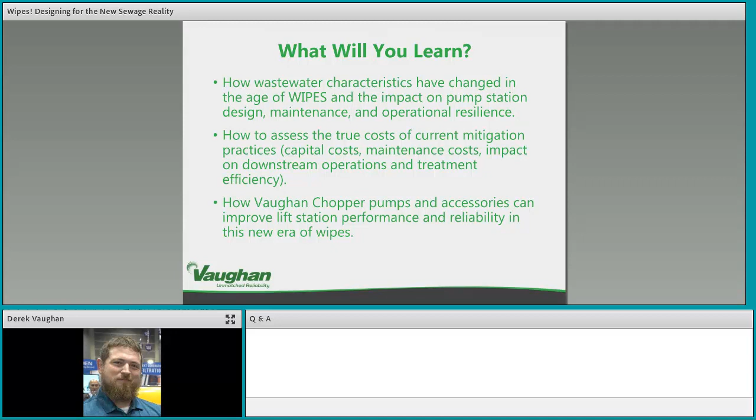So what we'll learn: how wastewater characteristics have changed in the age of wipes and the impact on pump station design, maintenance, and operational resilience; how to assess the true costs of current mitigation practices - capital costs, maintenance costs, impact on downstream operations and treatment efficiency; and how Vaughan chopper pumps and accessories can improve lift station performance and reliability in this new era of wipes.

So to start off, what is the new sewage? What do we see out there? The term 'flushable wipes' has been used, as you see in quotations. As we all know, it's non-flushable material getting into the lift stations and causing havoc - things like baby wipes, cleansing wipes, disinfecting wipes, throwaway mop heads, Swiffers, rags, diapers, elastics, hand towels, Q-tips, feminine products - things that are supposed to go in the garbage but instead make their way down the toilet or drain.

To compound this issue, we now have high efficiency appliances. One of the things they do in a lot of cases is use less water. So if you have less water but more solids content in your systems, that's where we're seeing issues. And I'd like to point out one thing common between every single one of these: they are non-spherical solids.

So what is the result of these flushable or non-flushable wipes? What do we see within our systems, specifically in pumps - can the solids get in, and if they do, what happens? Many times rags will create a rag ball and won't even be able to get inside the pump. They'll block suctions, bridge the suction, reduce flow. Long stringy materials will wrap on the impeller causing wear, due to large consistencies of rags. Once they get into the pump, they can get behind the impeller, attack the seal, and cause serious seal failures. And after the seal fails, if you're lucky, only the seal fails. If not, you could get infiltration into the motor where the whole pump is gone, or it needs to be completely repaired.

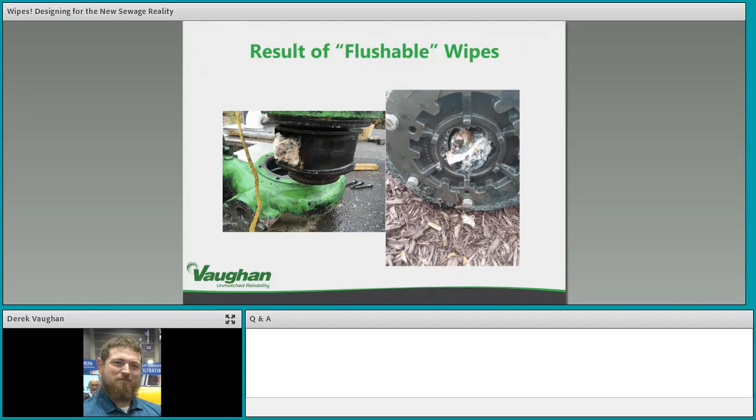So this isn't an issue that is quiet. Everybody hears about it. I'm sure you guys, just in March, there were articles in USA Today, New York Times, the Wall Street Journal urging people, do not flush these things. They wreak havoc on the systems.

We monitor social media and are involved in social media, and we are part of different operator websites or operator pages. And the buzz is the wipes are everywhere. They're clogging systems, they're costing more money.

The amp draw due to having rags inside your pump - the cause of having wipes in your system and increased drag on your impeller could be added electricity costs, higher amp draws. Here, like you see here on social media, we have where people ask, please don't flush these.

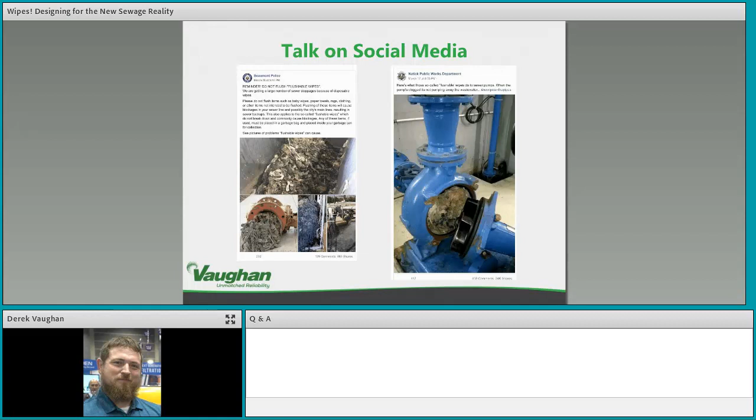states like Washington State, with House Bill 2565, has been passed by both legislative bodies, and it has to do with labeling non-flushable on the packaging of these wipes. Currently, California has a proposal in their House, Minnesota has a proposal in their House, and Washington, D.C. has already passed these labeling practices.

So what's the cost? This is a study that was done by the National Association of Clean Water Agencies. The annual cost of wipes in the United States that they attribute to this issue is $425 million. Some estimates on the web that we've read are even north of that, up to 500 million or even more. And other studies have shown that our friends to the north in Canada are seeing approximately $250 million of issues as well.

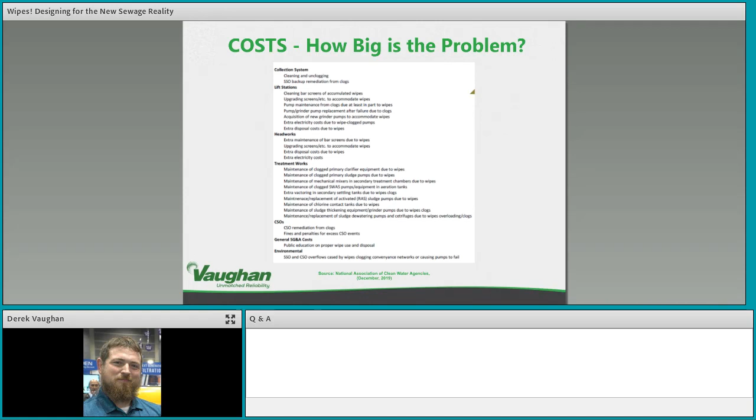So if we run through an example and we just take some basic numbers so we can create a baseline - what does it cost at least to work on a station? Now the cost of clogging in a pump station, what we've worked with other groups, they tell us it takes usually 2 wastewater personnel - you need one person there and one person to watch to make sure that everything goes okay. And if you were to say that in Washington State, the average salary of a wastewater operator is $31.24 per hour.

And you were to say that these guys are very good at what they do. They know this station really well. They may even have tools on site at the lift station, and they can do the unclogging in 2 hours. They can go down, cut all the rags out, cut the wipes out, remove them, put the pump back into service, and that only takes 2 hours.

Now, if you do that and you go down - and this is just like a Tuesday, a 9 a.m. on a Tuesday, no overtime, there's no overhead cost figured into this - if 2 guys, and it takes 2 hours, and they unclog a pump once a week, the base of that is $6,500 a year. If they go down and do 2 clogs a week, that'd be almost $13,000 a year. 3 clogs, almost $20,000 a year, and it goes up to $45,000.

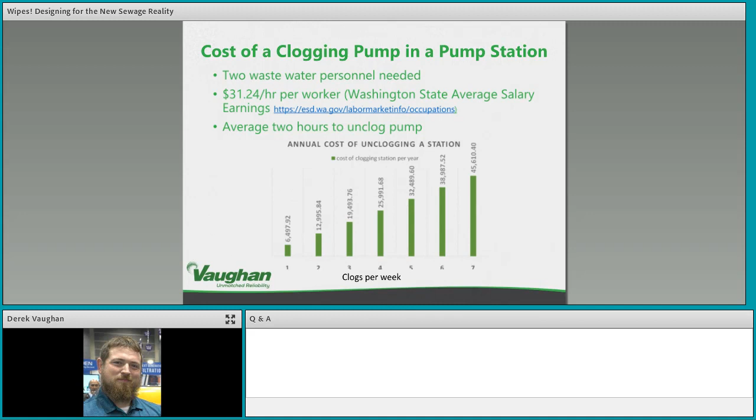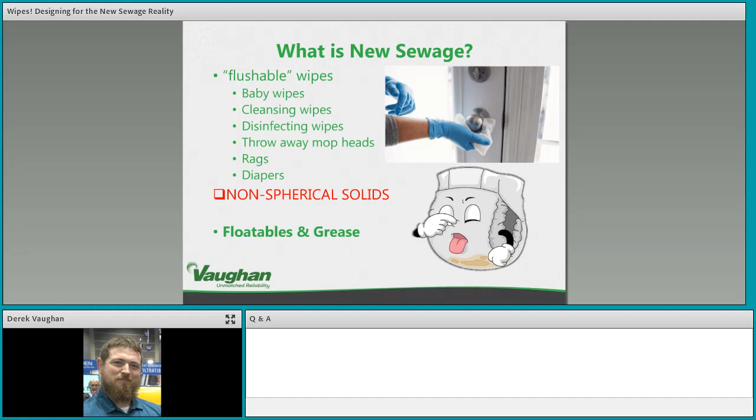So what else is in the new sewage? We've talked about the flushable wipes and all the non-spherical solids. What else are we seeing? Floatables and grease. So what is floatables and grease? Where do we see it?

Why is it there? We see it a lot in high traffic areas, restaurant areas, downtown areas, shopping centers, stadiums, anywhere where a lot of industrial cooking is done, or areas of housing where people are cooking their food and they decide, I don't want to take the grease and dump it out. I'm just going to dump it down the drain.

Well, that little bit of grease, maybe that one time isn't too bad, but if everybody in the area is doing it, you'll have an accumulation of grease on the layer. You'll get floatables. And the problem with that is the floatables will become intertwined with rags and wipes. And you'll have what you see here, which is a station in California.

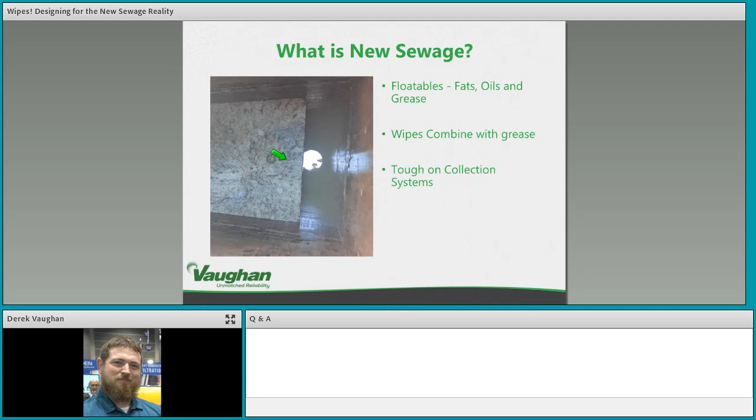So what is the result of grease in the collection systems? What does it do? Well, besides clogging a station, we all know it clogs pipes. That's an issue. But you get poor station operation, clogging, costly maintenance. How often do you have to clean that station? How do you clean that station? You can also get blockages.

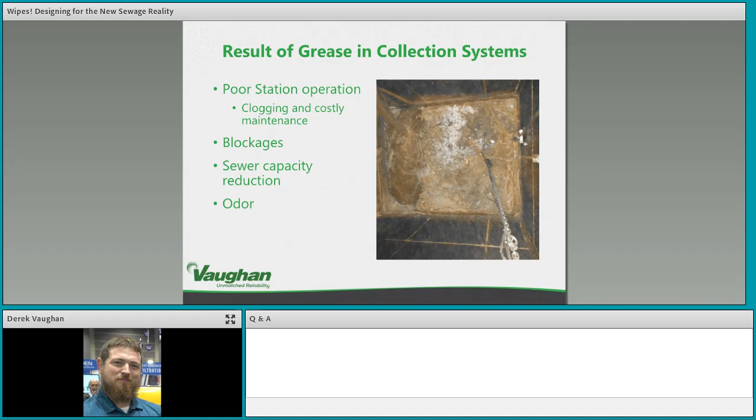What recently has come up is in cold weather environments, this floating layer will freeze. And when it freezes and the duty pumps pump out, this floating layer will drop on top of the liquid level, and it can break things. It can rip floats out of the wall. It can knock the pumps off of their base elbows. It can be an extreme issue. So it's a problem in a lot of areas. Also odor. If you leave that there could be an extreme odor issue.

So just some round numbers to talk about the cost of cleaning a lift station. Everybody has their costs. We've been told $50,000, $100,000 to clean this station. But what does that mean? Where is that coming from? When you clean a station, there's some things that you need. The potential for a vac truck is high. Do you want to buy a new one? Between $250,000 and $450,000. Do you contract it out? $255 to $295 an hour for vac truck services. These are all costs that were taken from Washington State.

If that's the case, you're going to use a vac truck. You also need a sewer pumper truck, because if you're vacuuming out the waste, you need to put it in the pumper truck and send it back to the wastewater treatment plant. What about a bypass pump? Do you need a new unit? What about the cost for that per day? Major rental companies have given us pricing on these things. And for a 6-inch model, you're looking at, in Washington State, about $450 per day.

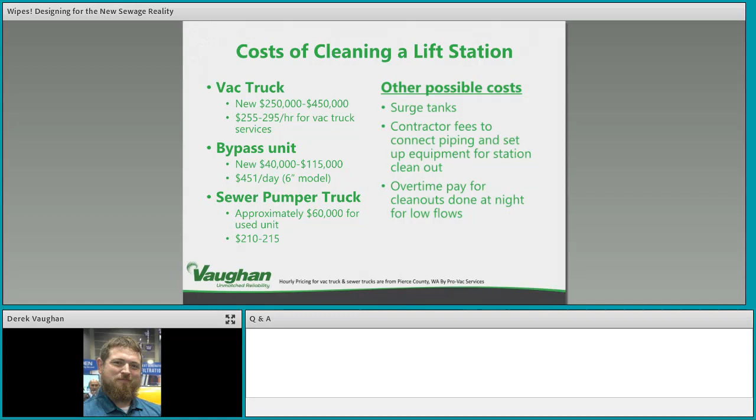The other things that might not be thought about when you have to clean a station is, can this station be taken offline or can it not? Is it an extremely important station? If that's the case, you may need surge tanks, and the cost just to bring them in could be $500-600 a piece just in freight. And then you start talking contractor fees, connect piping, set up equipment for station clean out. And if this is an important station that cannot be shut down, then you have to do the clean out at night. Then you add overtime pay and the pay of the other workers. It ends up adding up very, very fast.

Now, this is the cost of a typical city, 3 MGD. This was taken off of a municipal website. This was the winning bid for cleaning lift stations in Burlington, Massachusetts. Burlington is a town of 25,000 people, approximately 15 stations, and they actually contract with the group. They clean out every 2 weeks. Cleaning events, 780 hours is what they're estimating cleaning to be. The material costs, as you see, the hourly rates. The winning bid for this city was $180,000 per year to clean stations.

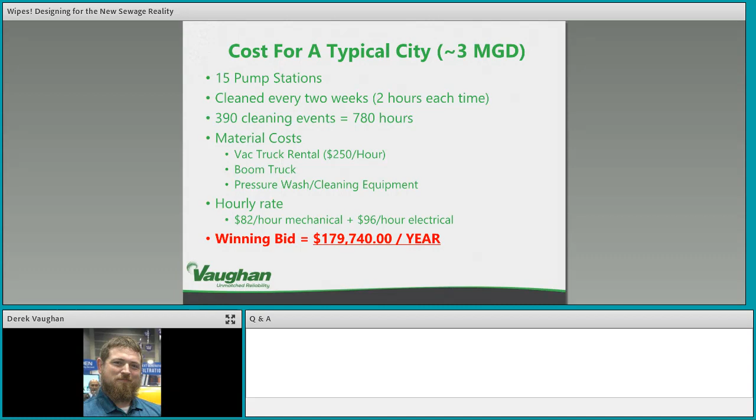One thing we haven't talked about is the cost of health and safety. We've talked about the cost of wipes and what they do to pumps and the amp draws that they cause, and the grease and the issues, but what is the cost of health and safety? To us, there isn't a cost. You don't want to be there.

And what you want to do is, the frequency of cleanouts, the frequencies of unclogging, the frequencies of draining an entire station and dealing with the waste, it's unnecessary exposure. So what we need to do is minimize this unnecessary exposure. I've been places before where you can see in this picture these rag balls and these hypodermic needles. They were calling these porcupine balls as they brought them up from the station because they'd be filled with hypodermic needles.

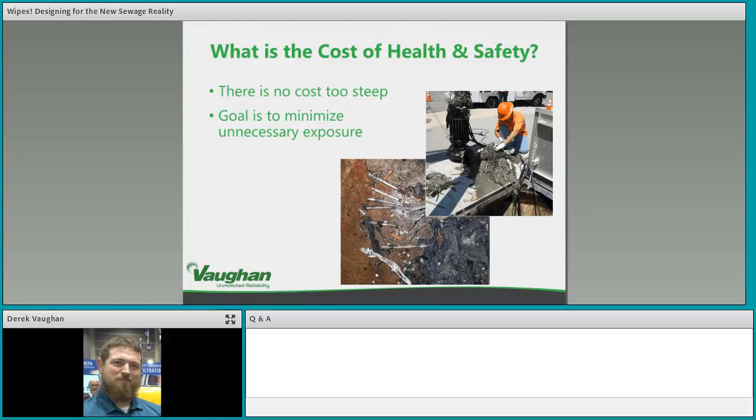So what can Vaughan do for you? What sort of innovative and reliable solutions to the new sewage do we have? We'll talk a little bit about Vaughan Company. We've been around for 60 years. We've been awarded 30 international and domestic patents for our chopper pumps and mixing equipment. This is what we do. We've been designed for tough waste and tough wastewater, for stringy solids, for these issues.

Now, this is a rundown of what we like to call the concept, which are our cutting features, including our Vaughan Flushless mechanical seal. So here at the eye of the shaft, we have what we call the cutter nut. And the cutter nut breaks up the low pressure zone at the eye of the shaft where you can get some rags that will form and ball up.

You have our stationary cutter bar with its cutter bar fingers, and the impeller, which has cupped and sharpened blades that rotate against the cutter bar fingers to create a scissor action that chops and then removes the material from the casing. And on the back side of the impeller, we have what's called an upper cutter. Now, this is for mechanical seals to prevent breakdowns of the mechanical seal, to prevent stringy material from binding and wrapping back there. And then we have our Vaughan Flushless mechanical seal, which is our design.

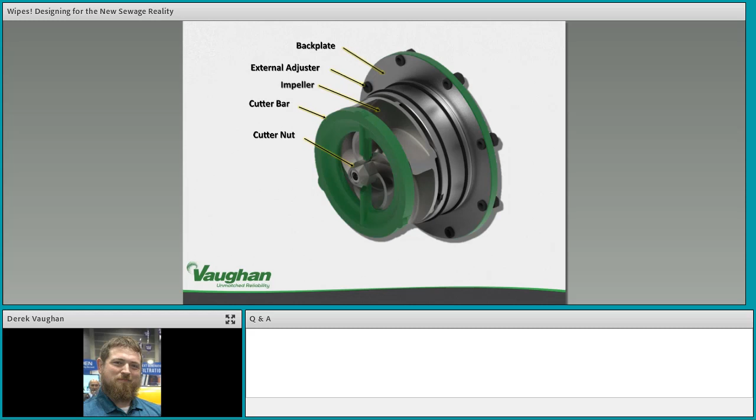And so one of the issues we had talked about is seal failure. And in order to prevent seal failure, Vaughan Company has created a patented back cutter system, including insert cutter, which prevents stringy material from wrapping and binding around the mechanical seal. In many places in here, you have a cavity in other people's pumps, and that cavity can fill with grease, with sludges, with stringy material, and then cause seal failures.

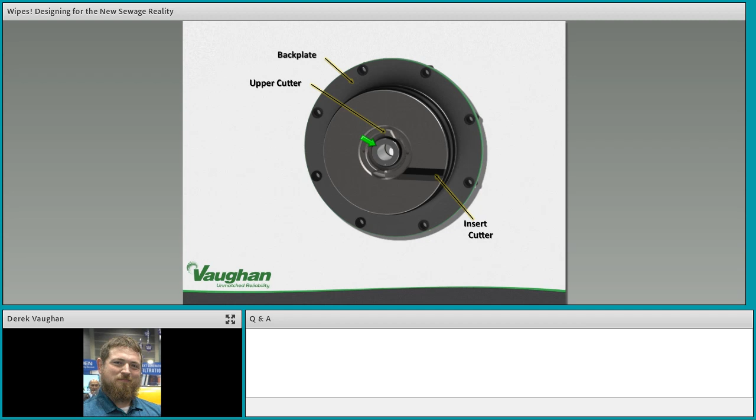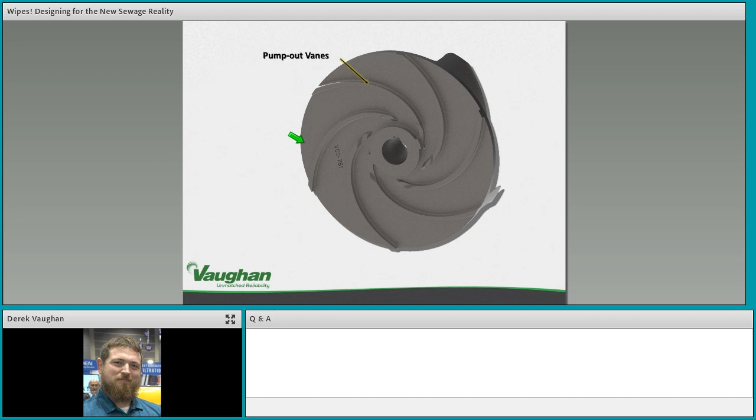So what do you do once you chop the material away from the backside of the impeller? Well, at Vaughan Company, we incorporate pump out vanes. So as those stray stringy materials get cut away from the upper cutter, they are sent along the impeller vanes and forced out. So we don't have those stray solids getting stuck behind the impeller. Again, the job is to get the material in and get it out as fast as possible.

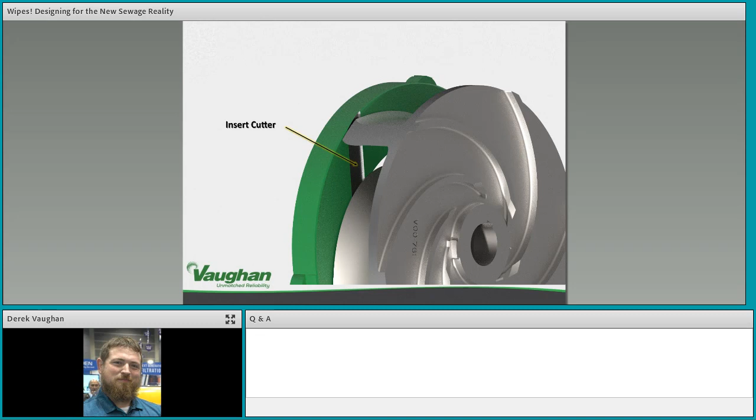Vaughan Company has identified these crucial pinch points, and we've created cutters in those areas to prevent that binding that you will see. The other thing that the chopper pump does is it creates a natural turbulence within the pump. We do very well with grease. We handle it very well, in that it doesn't stick to the inside of our casing like it can for some other pumps because of that natural turbulence. We pump a lot of fats, oils, and grease at wastewater treatment plants for this reason.

So Vaughan Company in the 90s decided to start designing and manufacturing our own Vaughan Flushless mechanical seal. The reason is the radial loads caused by chopping were breaking third-party seal faces regularly. So we needed an option that allowed us to have longer life and be able to deal with these stringy, tough solids and the radial loads caused by chopping. So in the 90s, we came up with our Vaughan Flushless mechanical seal. It's been in service for over 20 years now. It's what we recommend in every case.

It is a cartridge type, so it's easily removed and easily replaced. It is oil filled; it is in an oil bath. The seal faces can come in silicon carbide or tungsten carbide. They come standard as silicon. The tungsten carbide faces we use in gritty environments where we may run hotter, and it could be a better option for longer seal life. Like I stated before, our design eliminates the stuffing box and cavities behind the impeller. We saw that as a weak point and an issue, and I believe we've solved that.

It's easily maintained. As you can see, there is a vent here. So as the pumpage may blow by, which happens naturally in mechanical seals, you'll have some weepage across the seal faces. If you do get anything that collects in here, this release valve will allow it to drip out. And once you notice that, it's easy to go and flush really quick and be able to move on.

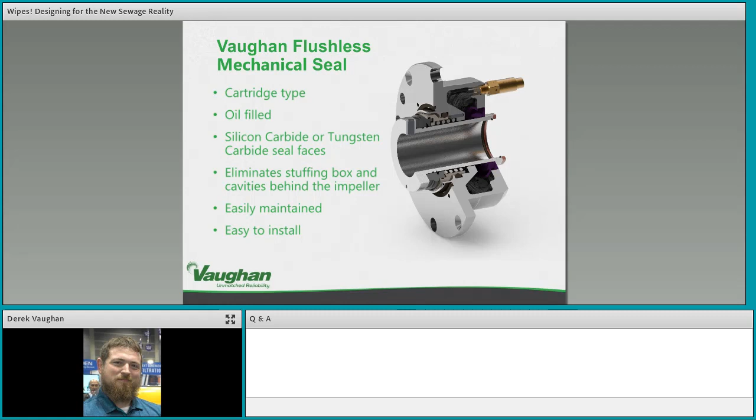So since we're talking about mainly lift stations, I wanted to discuss our Vaughan Chopper pump and our submersible Vaughan Chopper pump specifically. We do things a little bit different than other people. We've added a Vaughan mechanical seal to the mix, which is placed inside of our bearing housing. And you'll notice that we are not using the motor shaft. We're running two shafts, through a bearing housing. The reason is that if you do have a seal failure, it happens. It's going to happen eventually with any pump. If you do have a seal failure, it doesn't go directly into the motor cavity and then fry the motor.

If you do have a mechanical seal failure and you do get intrusion of liquid, a milky type substance, or it just drains the seal oil all the way out, we have an oil level monitor relay that can be connected to the panel. This is an early warning sign and an early detection system that helps protect. It's a reliability issue. We want to be reliable. We want to make sure you know if something happens.

As you can see here, this is a non-flexible coupling. This is a steel coupling. We've added another thrust bearing down here. These have 100,000 hours of L10 bearing life. Every submersible does, every Vaughan pump does. We want these things to work and we want them to last.

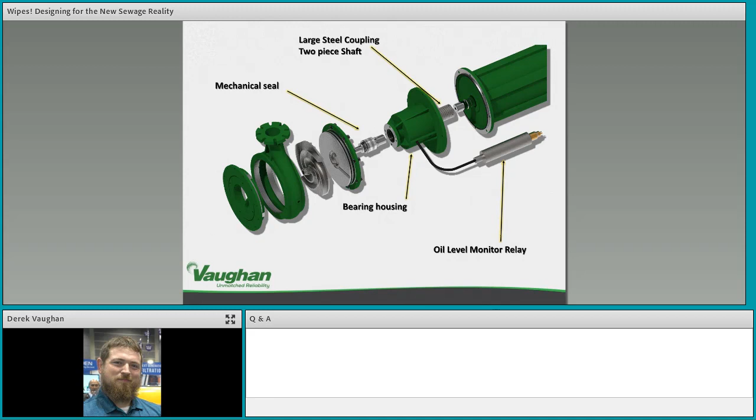So what sort of things can Vaughan Company do for you, and what sort of costs can they save by using a chopper pump? This is a case study we did several years ago. This is the Aberdeen Influent lift station. The old pumps that they had in service were clogging on rags. It was happening approximately once a day. It was something that was on a schedule. They knew that they had to go down. They knew they had to unclog it. It was what it was.

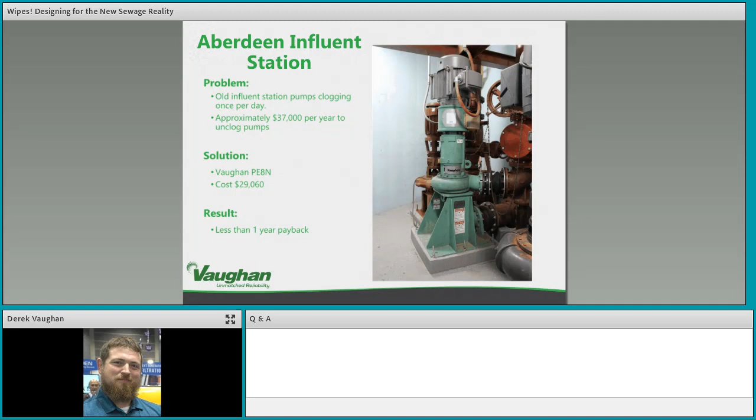They called up Vaughan Company. We were able to offer a pedestal pump, a drop-in pedestal replacement. They didn't have any clogs for the rest of that year. So with the cost of that, $29,000, they were able to remove the cost of unclogging that lift station. And at this time, they're looking at purchasing a larger pump or sourcing a larger chopper pump to help with more flow.

One thing I'd like to point out, Vaughan Company knows that some customers are on budgets. You can't always do a full capital project. So how do we mitigate costs in order to help out with these sorts of problems?

Vaughan Company does retrofits, and we're adaptable. In this situation, we were able to make a custom base which matched the suction and discharge heights, which made piping changes very limited, so we were able to reduce costs to install the pump.

We also can use existing guide rail systems, and we can adapt to many of them.

Lots of times we end up replacing grinder and non-clog combinations. That combination has its place, but there are issues with it. You have two pieces of wearable equipment to maintain, often two panels, and the cost to repair grinders can be very expensive. So we've been able to replace a lot of those with one piece of equipment that can do the same thing two pieces of equipment do.

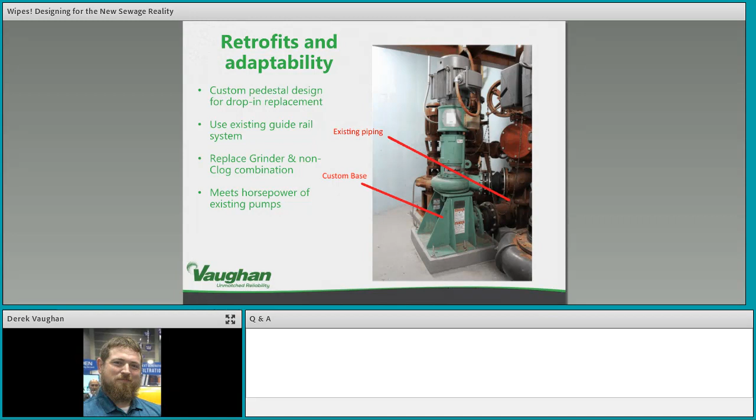So, solutions to floatables and settling solids. What can we do to counteract the issues you're seeing with floatable layers and settling solids that happen in tanks?

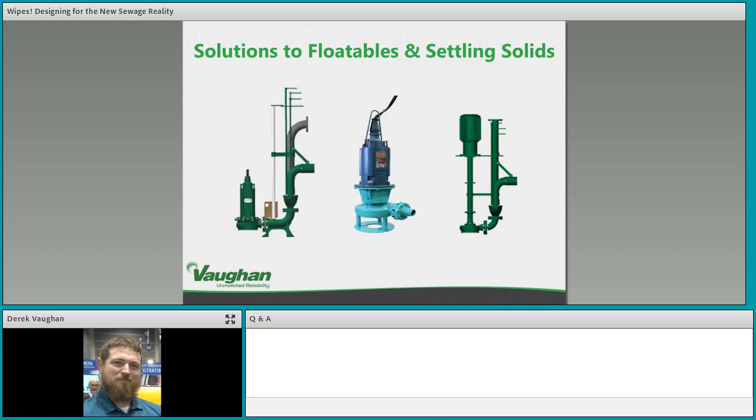Here on the left, you'll see our submersible pump with recirculation device. This allows for 100% of the flow, the duty flow, if this is the duty pump, to be sent back into the pit to help homogenize and mix. We have the exact same thing for our vertical wet well configuration if that's something you'd be interested in. And also in the center is our conditioning pump.

To talk a little about recirculators and submersible recirculators specifically, a recirculator is essentially a pit cleaning device. Once you throw the valve into recirc mode, you're resuspending solids, homogenizing the mixture, and pumping out. So how do you clean something? You can't reach in and grab the floating layer, and you can't reach out and grab what's settled on the floor. So in order to get that out and clean it, you need to homogenize, mix it together, create a slurry, and then once it's all slurried, you can flip the valve and pump out.

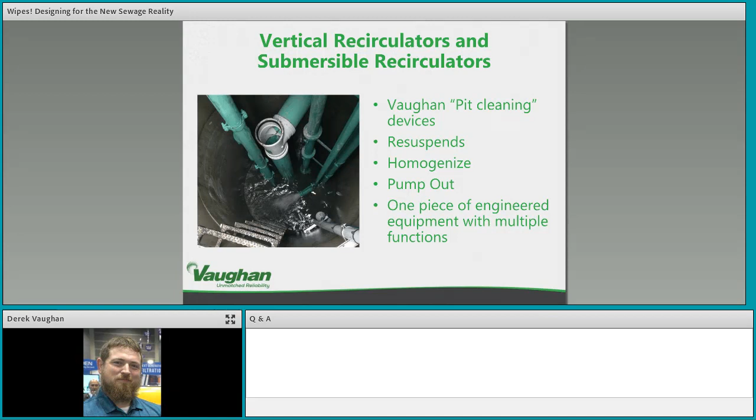What we're saying here is this is one piece of engineered equipment that has multiple functions. You can do the pump out, the mixing, and the station cleaning, all with one rotating piece of equipment.

Here's a picture of some submersible recirculators. As you can see, we have the ability to run a duplex system, and you don't have to have recirculators on both pumps. In this situation, we only have it on one, so they can enter recirc mode. These nozzles are adjustable a minimum of 180 degrees horizontally and 45 degrees vertically. We can also run this on an auto valve actuator system where you can be in pump out or recirc mode.

The importance of having recircs in a station like this is to prevent mats from forming in the first place. We want to be proactive, not reactive. So how can we prevent these issues from happening altogether? That's continuing agitation in a station in between pump outs. Depending on the station, it depends on how often you have to pump out or how long your recirc mode runs. But that's something we would be able to help decide.

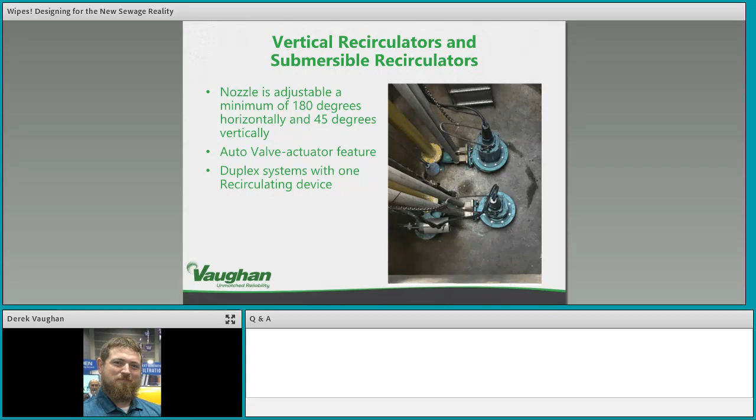So for the next couple animations, we're going to work through how you go about adjusting the nozzle and the adjustability and valving that's available here. We've got a little bit of an animation here. As we work through these, this will show the different operations of the vertical recirculator, and this will be the exact same setup for a submersible recirculator, except you won't have the discharge pipe and motor. You'll just have the different handles and accessories.

As we open this valve here, this valve down here will go back and forth as it swings open, and this is how you change between discharge and recirc operation mode. It's just a simple valve on a handle that you can turn, and this is the handle that would be attached to an auto valve actuator for applications where you want to set this on some timing where you're recircing for a certain amount of time and then switching over to your discharge. Next, we're going to show how you go about changing the direction of the nozzle.

We've got a little dog ear here that holds it in place and locks it in. This can be locked, and then when you open it, it frees up this handle to move, so you can move this back and forth. This changes the direction of the nozzle down here and allows it to swing. This only shows a limited range so you're able to follow it. We weren't able to add the video animation in here because of different connection speeds and how everybody would view this differently, but this will actually swing all the way to 180 degrees. That's how you control the back and forth motion.

For the up and down directions, there's a pin that comes in here to hold it in place, and then this can be raised and lowered to move this up and down. So you can see as this goes up and down, the nozzle goes up and down, and that's got 45 degrees of motion. And then whenever you're done moving the pit, you put the dog ear back in place, and you're ready to go.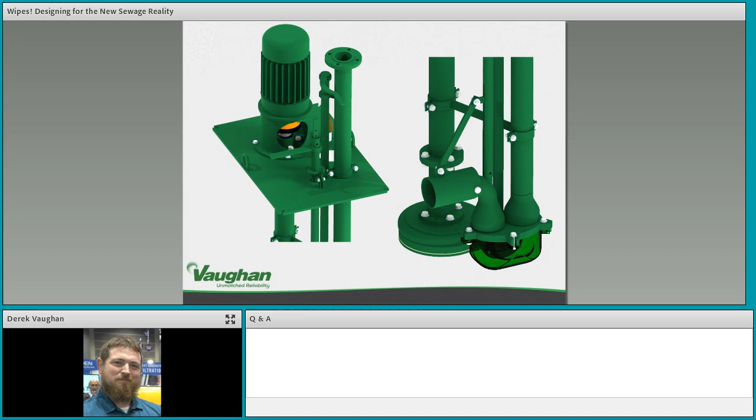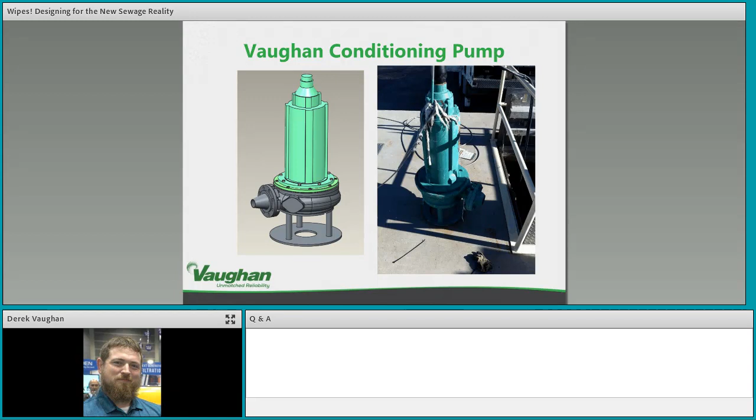So moving on, what else does Vaughan Company offer in order to slurry a pit? Our patented Vaughan conditioning pump is one way to do it. We've had these for approximately 5-6 years in service. We have close to, I think, 75 out there working, and it seems like whenever we get them out there, there's success. So what is a conditioning pump?

A conditioning pump is a chopper pump on a stand with a high velocity steel mixing nozzle. What it does is it's mobile. You can put it in one pit, mix it up. Once that pit's mixed up, you can take it to the next pit, mix that pit up for easier cleanout. There are multiple styles of nozzles for aiming configurations - we have up-aimed, we have double nozzles. We also have different nozzle materials. They can come in mild steel, stainless steel, or a polyurethane type material.

One thing is we also use oversized bases, and what I mean by oversized bases is this portable stand right here. As you notice too, the nozzle is located below what would be the center line of the pump, the center line of gravity. So as this mixes, there isn't an issue with it tipping over.

Also, this is an engineered solution. It's very important to point out that we need to know what the exact problem is that we would be dealing with. Is it a floating layer on top? Is it rags and wipes that could be clogging a duty pump that we need to take care of? Is it settling solids? Or is it everything? We have sizing based off of all of it. We have sizing based off of what we need to do to mix a crust on top of a pit.

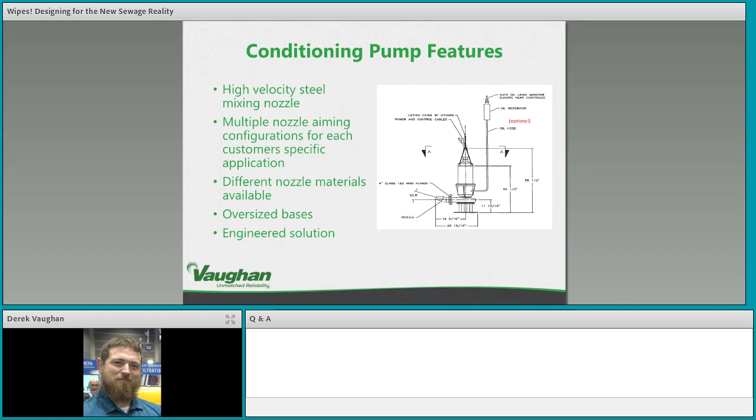And what are the applications to look for? Lots of times we see them used as protection for non-clog pumps. You end up in an area where it's too expensive to replace the non-clogs, too expensive to go in and clean the station all the time. So you can put this pump in there with the chopper to recirculate and mix, homogenize solids, floatables, and grit, get it back into suspension, allowing the duty pumps to pump out and get everything out.

A lot of times when these are used, we've been able to eliminate the use of vac trucks completely. They've been able to just go away. Another option is that it lengthens the time of cleanouts, so you don't have to go in there so often.

One great side effect of any recirculator pump that Vaughan puts out on the market is that you're consistently mixing this material back into suspension. And when you do that, it allows a constant stream of these solids to go to the wastewater treatment plant. You're not getting a slug of it, not getting it vacuumed out and dropped right into the headworks. You're getting this constant metering of material in that the screens can take care of as it gets to the screen.

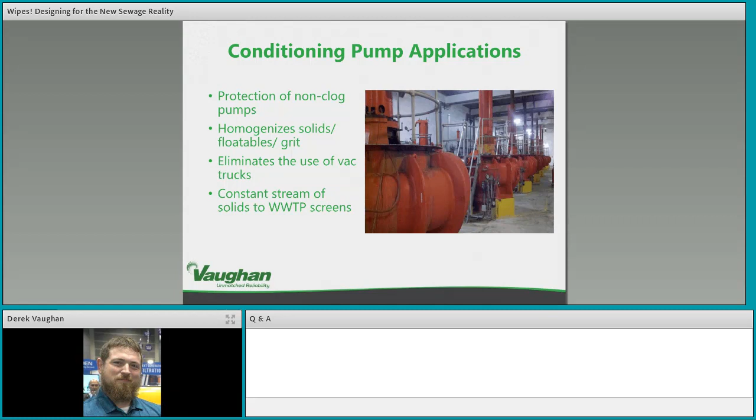We also have control panels for the conditioning pumps. Again, they're like the recirculators. They can run as often as 24 hours a day, 7 days a week, or they can run intermittently. We can run them on floats and timers. We have moisture and thermal relays. We also have an oil monitor relay, and that's optional.

For the conditioning pumps, I want to note that it is optional to have the oil level monitor relay because they are mobile, they do move around. So what we do is we plug the bearing housing and just say, please do your preventative maintenance. Don't lax on that.

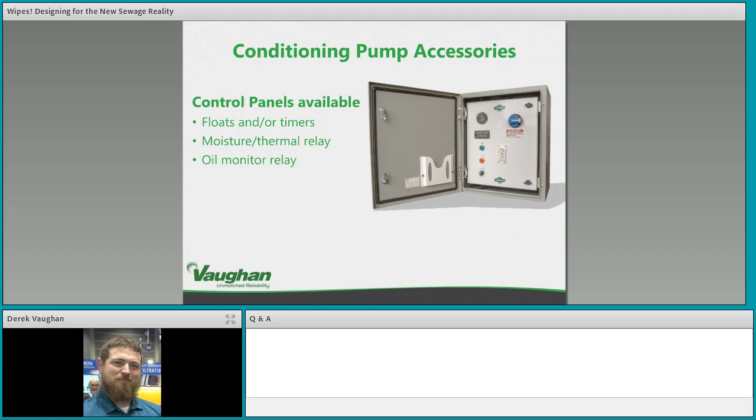So how do you make your conditioning pump mobile? We talked earlier about using one pump in multiple stations. One way to do that is to have multiple panels at multiple stations and using quick disconnects for the cables for each station. That's worked out well for some customers. Others have been using mobile generators to move their conditioning pump around from station to station for areas having issues with floatables and wipes.

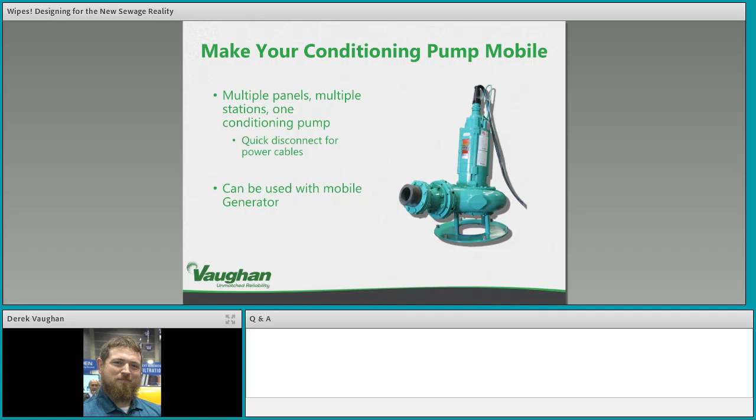But we also have these sized out as hydraulic submersibles, so they'll have hydraulic motors as well. All of our submersible pumps can be run off hydraulic motors, but in some areas where power is an issue and you do have a power pack available, it is a way to use these.

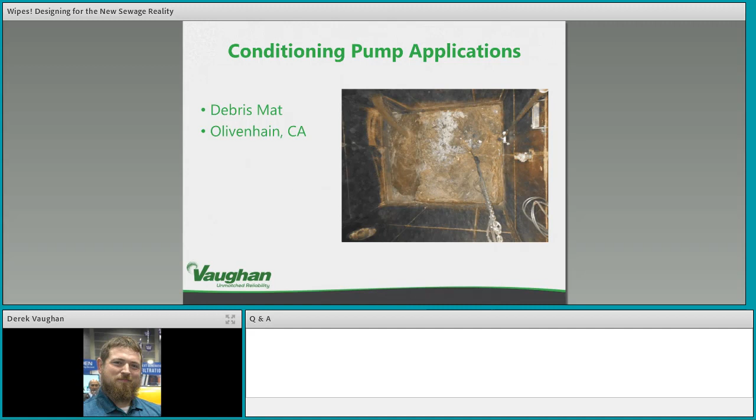So to speak about some applications, here's an example with a good before and after picture of a debris mat. This debris mat was anywhere between 6 inches and 24 inches, depending on the time of year and time of day and what was going on. It was a tough place to get a vac truck into. I had to back down a drive, had to close half a road down. It was a production to get it done. So this is a before and this is an after.

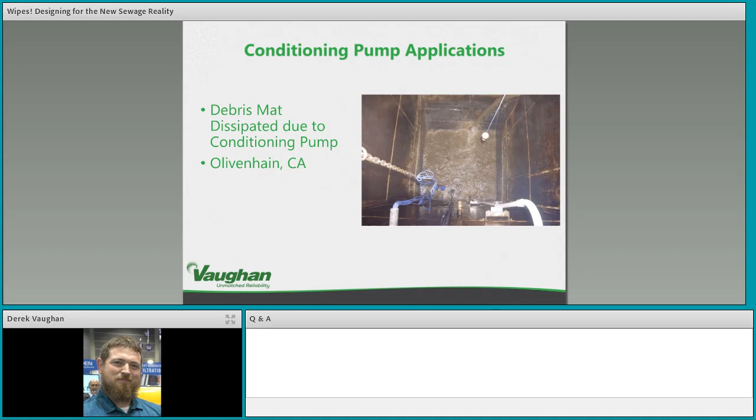The debris mat is dissipated due to the conditioning pump. It's also done a great job of protecting the non-clog pumps that are the duty pumps in the station.

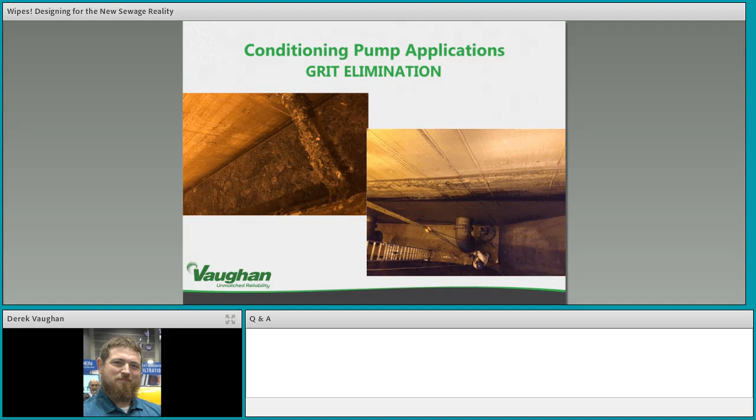Another thing it can also do is eliminate grit. When grit settles out, the pump can't reach out and grab it. The duty pump can't, it doesn't have arms. So in order to make that happen, you have to be able to mix everything up, get it homogenized, for the duty pumps to be able to pump out.

The Otay River Pump Station, this is some cost savings associated with the conditioning pumps. They had a huge floating layer of grease and solids, large deposits of grit as well. They were spending anywhere between $50,000 and $100,000 per year in station cleaning. This includes vac truck costs, the possibility of other things like surge tanks, contractors, everything. At that time, the duty pumps were huge, or they still are, but they were too new and too expensive to replace. So what were we able to do?

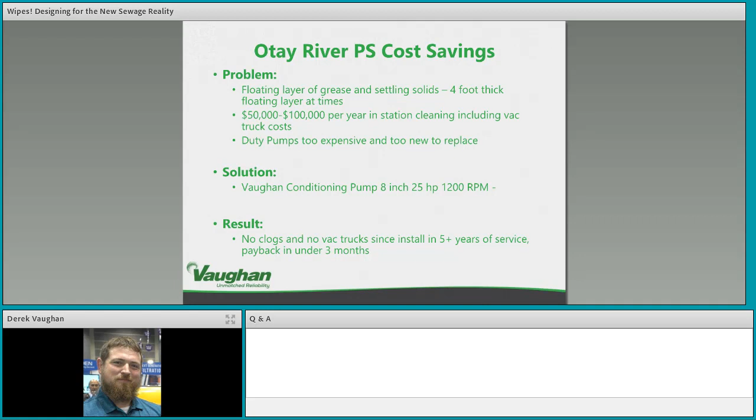Vaughan Company was able to offer an 8-inch submersible conditioning pump on a portable stand using 25 horsepower. Since we've put that into service, there have been no clogs and no vac trucks have had to go back to that installation in 5+ years of service. The payback was in under 3 months.

Now, what about reliability? We've talked about some accessories and how the chopper pump works, but what about reliability? We have hardened cast steel parts to a Rockwell 60C. They come in stainless steel, CD4, MCU.

Our pumps come with externally adjustable features for ease of maintenance, so that you don't have to rip the whole pump apart. It all can be done externally. We allow for 100,000 hours of bearing life for every model. We have our own Vaughan mechanical seal. And we also have our oil level monitor system for dangers that could happen for seal failures, early detection systems.

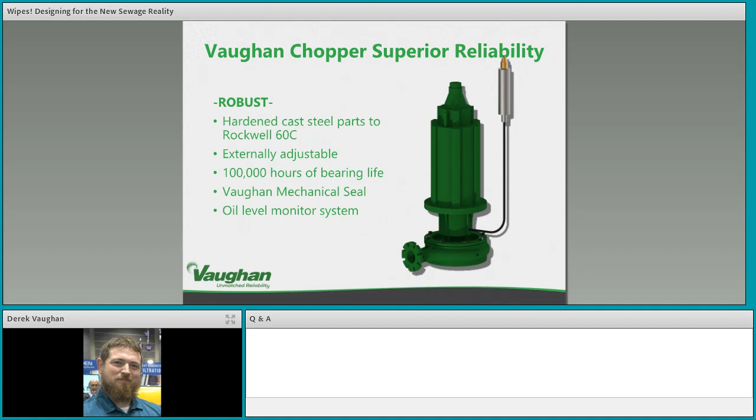Vaughan Company also carries $5 to $7 million of spare parts in inventory. We built 2 new buildings out back in 2016 that totaled a 100,000 square foot addition. We're here for the long haul. We're here to stay. We have expedite options available. We have try and buy programs available, install lists available upon request, and we are made in the USA.

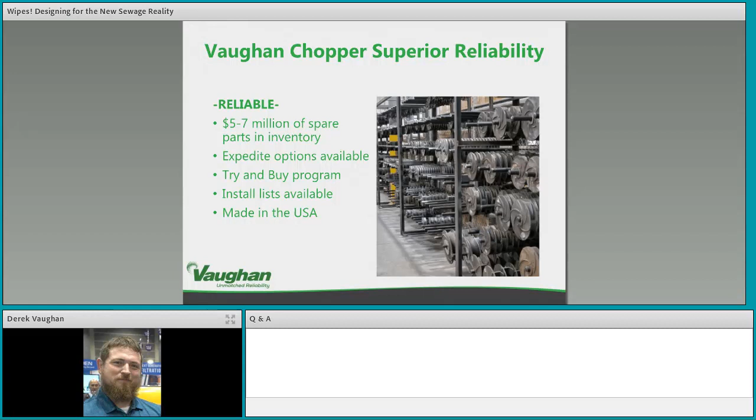Now, what does reliability look like out in the field? This is a case study that we did with Morgan's Point, Texas, and it resulted after Hurricane Harvey. They were having issues with some existing non-clogs, some ragging issues. Sorry, that's a typo, it should say 2016, not 20016.

They were replaced in 2016 by a Vaughan pump. And in 2017, Hurricane Harvey hits Houston, totaling 100 inches of rainfall over 72 straight hours. The station with these Vaughan pumps saw 2.5 million gallons of unscreened sewage, and we had 0 clogs. We waited out the storm.

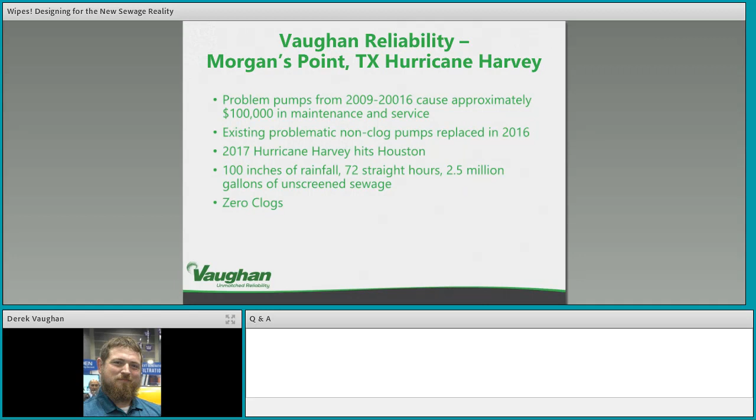So what are the lessons learned? What did we see? What have we talked about? New sewage is attacking our collection systems and wastewater treatment plants. Current non-clog pumps have difficulty pumping and handling new sewage that has non-spherical solids. It's a very important point.

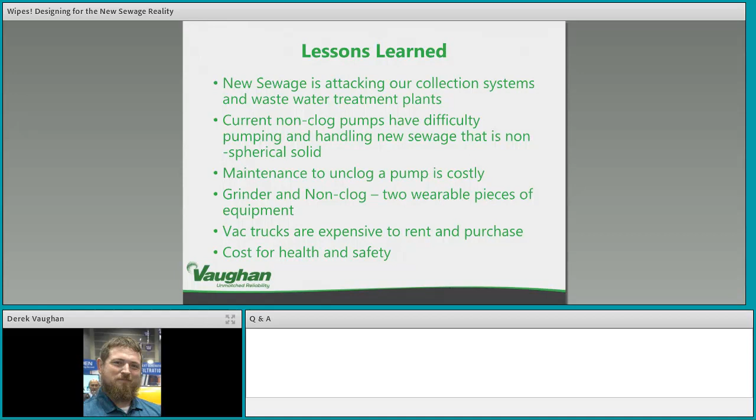Maintenance to unclog a pump is costly. The grinder and non-clog, even though there is a place for them, are 2 wearable pieces of equipment and they're not always necessarily needed. Vac trucks are expensive to rent and purchase, and there is no cost you can put on anything for the health and safety of personnel.

Vaughan has a solution. Our pump was designed prior to this wipes issue to handle tough, stringy solids. We were designed for this from the beginning. 60 years ago, my great-grandfather invented the chopper pump with hard, tough solids in mind. And that's the way we've been able to continue throughout this for the last 60 years with these 30 patents that we've received.

The recirculation or pit cleaning feature is very important. We want to be able to be proactive, not reactive, in these stations. We want to be able to homogenize the mixture and get it out, a single piece of equipment for multiple jobs. This also allows for consistent metering of materials to the plant, helping even loading at the plant.

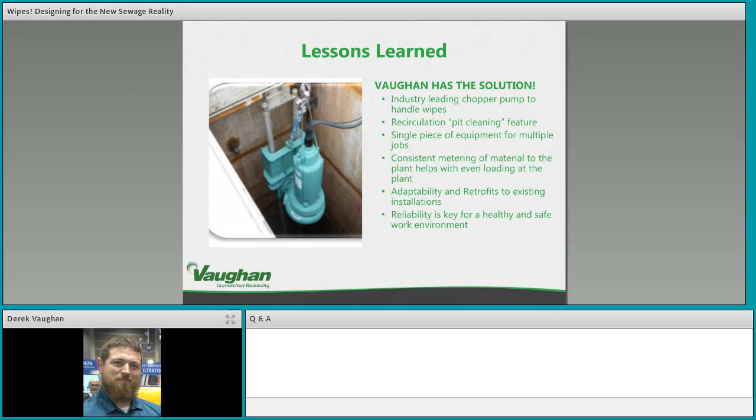We also are adaptable and we do retrofits to help budgets out. And reliability is the key for health and safety in a work environment.

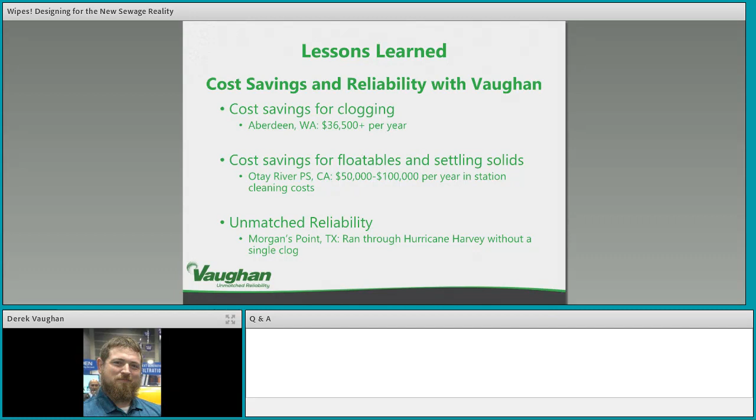Just to round out some of the cost savings from the slides today: Aberdeen's were $36,500 per year. Otay River was between $50,000 and $100,000 by eliminating vac trucks and the cleanouts. And we have unmatched reliability as seen in the Morgan's Point case study. We ran all the way through Hurricane Harvey without a single clog.

Well done, Derek. Thank you. Very nicely timed, right there, with plenty of time for Q&A.